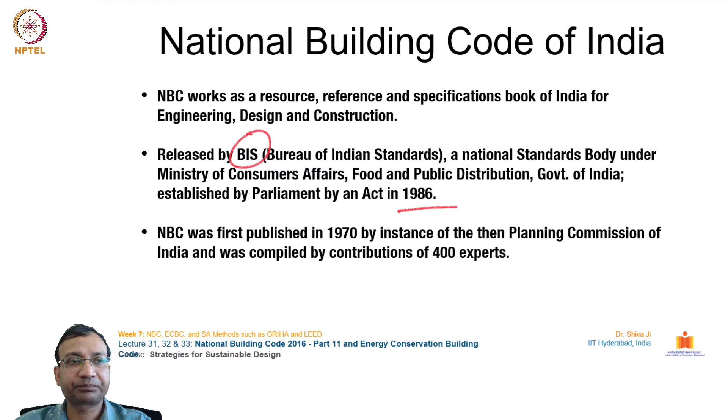NBC was first published in 1970 at the instance of the then Planning Commission of India and was compiled by contributions of over 400 experts. National Building Code of India 2016. In recent times, there is a huge change in growth and development, and there is a huge push observed in this sector, and the growth is happening very fast. So, how can this growth be maintained at a pace which corresponds to the aspects of sustainability?

With that need, this new edition was launched with an additional part, Part 11, which talks about approaches to sustainability. Due to huge changes observed in building construction activity, occupancy patterns, lifestyle changes, new material and technology uses, and a greater need in environment protection in the recent decades, there has been a paradigm shift in design and construction.

A comprehensive revision of NBC was undertaken by 22 internal expert panels involving around 1,000 experts from across various fields. A revised edition was released in 2016 with inputs from contemporary international and Indian practices. It comprises 12 parts with various sections within.

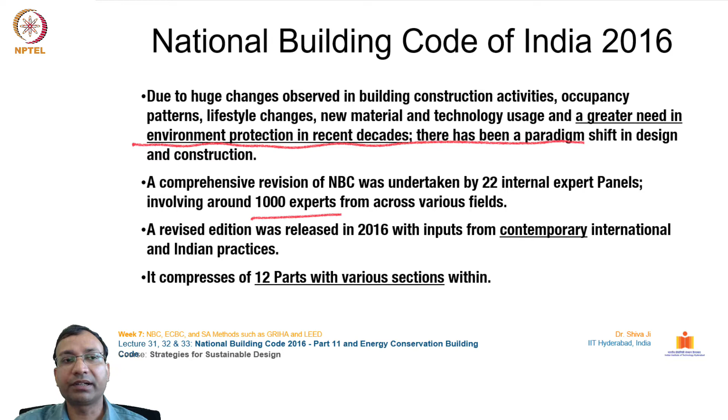So, how does this NBC work? There is wisdom taken from ancient Indian texts. I'll elaborate over here. Ancient Indian wisdom of architecture to live in sync with nature. We have been discussing several times how the ancient cultures across the world have been surviving for thousands of years without causing damage to nature and other species, other living beings.

The same was followed in India also, how our forefathers and ancestors have lived on these lands for a very long time. So, is there anything to learn from that? Let's have a look at it. Vedas have elaborated on the importance of living with Panchabhootas, that is, five elements of nature. From very early traits of our civilization, ancestors have shown strong concerns to preserve and sustain nature and surroundings.

There are several instances of weather cycle, rainfall patterns, crop management and its dependence on the weather system, control of insects, ecological balance, and several related topics. Such topics are discussed in these ancient scriptures about the annual cycles of climate and weather, how crop cycles are arranged according to the annual movement of earth around the sun, even the control of insects and maintaining ecological balance.

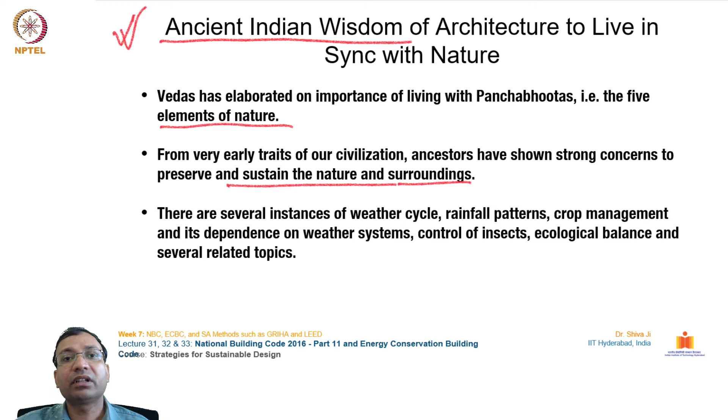Even growing crops which could be healthier for the human body in specific months. Paddy is sown in the months of monsoon, so that it gets ample rainfall and rainwater, as the paddy crop consumes a lot of water, and accordingly we can see such cycles are designed.

Historians and travelers from ancient times have recorded the use of local stones in palace making in the Mauryan period from 2nd century BC, etc. Mandu has rainwater harvested lakes surrounding the fort. We have seen the pictures of the palaces and forts of Mandu, one of the amazing pieces of architecture from those times. Stone jalis are famous to house cool air circulation in the narrow lanes of Jaisalmer, with provision of vertical air ducts from lower floors of Havelis.

We have seen these wind towers where they used to take in outside air, cool it down while passing through that tunnel, and then it emerges within the internal quarters of the Havelis, with the touch of those thick walls, and sometimes water bodies, water kept flowing inside these palaces.

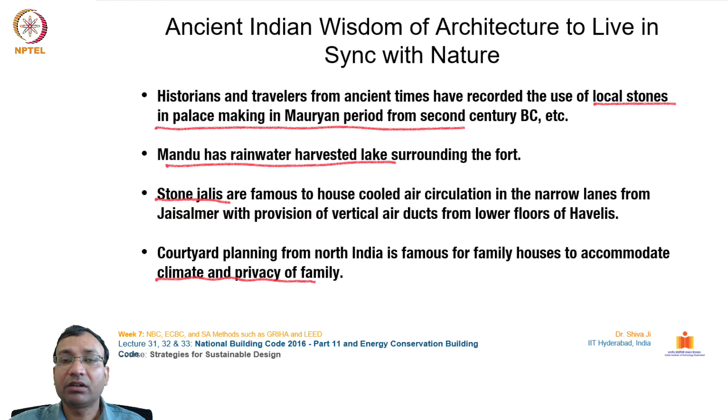Courtyard planning from North India is famous for family houses to accommodate climate and privacy of family. So it shows attention was paid towards understanding of natural elements and environments. They tried to align their designs with nature's way. This is the gist in a nutshell. We can say that the ancestors, the forefathers, tried to align their designs with nature's way.

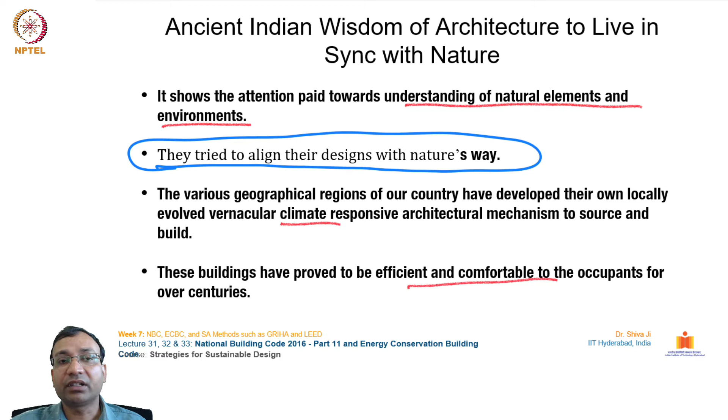The various geographical regions of our country have developed their own locally evolved vernacular, climate responsive architectural mechanisms to source and build. These buildings have proved to be efficient and comfortable to the occupants for over several centuries. The earlier buildings used passive energy efficiency techniques with no external intervention whatsoever. They stood individually, supported by surroundings only.

We see heavily industrialized and externally dependent buildings in recent times. With the buildings being erected these days, as we have been reiterating several times in our previous lectures, we are sourcing materials from across the country, in some cases from different parts of the world also. There are several repercussions of it, in the form of indirect emissions, indirect energy consumption, and several other ways.

But in ancient times, the buildings were completely based on local resources, local energy and local manpower. So they were not dependent. These buildings used to stand truly alone, with the help of the surroundings, with the help of the climate. They used to function very efficiently, providing comfortable quarters inside them. Modern buildings cannot function at all without external intervention and support of various types. The moment we stop the supply of electricity, our buildings are going to completely fail to function.

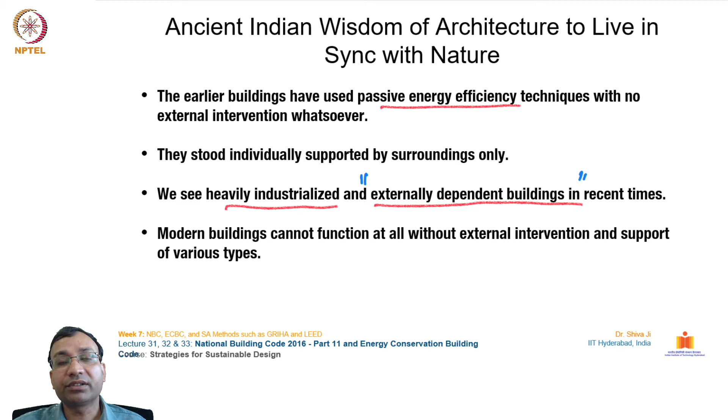Isn't it the scenario? Why make such buildings which are entirely dependent on external services and inputs? So this is the motto here to discuss. Why have such buildings which are externally dependent? Why not make them sustainable, make them stand alone on their own? If they need power, why can't they generate power on their own? If they need other resources, why can't they use the resources from the vicinity only? So that is the concept.

Today's India is again moving very fast towards creating a bigger than ever infrastructure and urbanization. We are witnessing several schemes under implementation. They are at various stages of their implementation, and they are promoting fast growth and development as far as infrastructure and the design and construction sector is concerned. It appears that soon India will no longer be a country of rural, agrarian landscape, but it's fast turning into an industrialized economy and society.

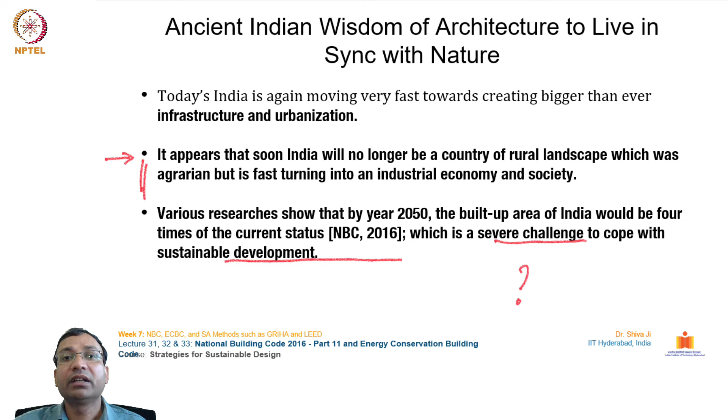Various researchers have shown that by the year 2050, the built-up area of India would be 4 times the status of the year 2016, which is a severe challenge to cope with for sustainable development. Whether India is going to behave responsibly in this fast paced development? So let's see what is the light ahead, how India has been doing traditionally, from ancient times.

We can see ancient Indian wisdom gives us three important attributes. The first one is aparigraha, the second one is sanrakshan, the third one punarchakran. The first one, aparigraha, means minimum possession. That means minimum consumerism, minimum resource utilization, minimum taking of resources from the surroundings or from anywhere. So minimizing the need; this is what we have been discussing in our previous lecture as a strategy for how to minimize the waste.

The waste is generated by the mindless consumption of products and artifacts, and even utilizing lots of services which are not that critical to meet our needs. So we have entered into an experiential economy, where we have fulfilled our basic needs and we are going beyond that. That approach is generating a lot of waste. That approach is forcing our economy, our industries to produce a lot of stuff, which is turning into landfills, and the whole place is getting polluted.

This concept, this wisdom is already given in our Indian text of aparigraha, that means minimum possession. Second, sanrakshan, that is conservation, minimum consumption. So consuming things in very little quantity, as much as we need, and preserving the rest. That means minimizing the consumption. First of all, minimizing the possession, then minimizing the consumption.

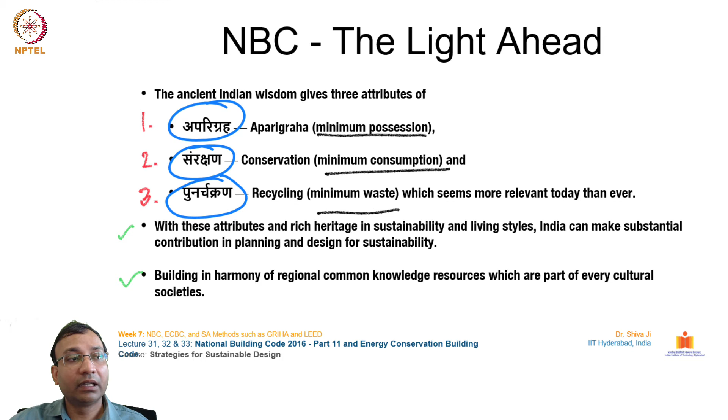Further, what are the new additions based on these philosophies, carried out as a new part in the NBC 2016? We have seen the challenges we are facing and the strategies required to deal with them. Drawing from contemporary case examples and studies in sustainability sciences, and from our ancient wisdom, the team has come up with some solutions and recommendations for creating a new part devoted to approaches to sustainability.

So we will discuss the new additions in the NBC. A whole new part, Approach to Sustainability, is included in NBC 2016. Comparing the two consecutive editions is itself sufficient to emphasize the importance of sustainability in the design and construction sector. There is a whole thought process behind introducing this part in the NBC as a resource document.

This book works as a reference and resource book for practitioners, educators, students, manufacturers, builders, every stakeholder related to the design and construction sector, because this book is constitutional in nature and is binding. One must follow the recommendations and guidelines given in this book for any building services, for any human comfort design, etc.

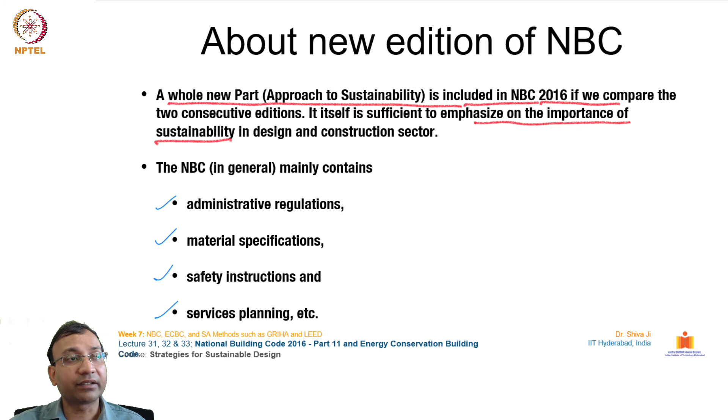About the new edition of the NBC, Part 11 talks about performance and incorporating localized features based on geography, environment, priorities, and agenda. It is not specific to any rating system and doesn't intend to set a single metric to measure and rate building performance. The provisions are kept flexible for a practitioner to use this code objectively where required. NBC gives the opportunity to pick up its individual codes and provisions and apply them as per the principles of sustainable development, functionality, comfort, safety, and other considerations for the project.

So as you can see, this NBC as an overall document is a huge compilation of the considerations which could be necessary in any given situation on the construction site.

So this provides an extensive, and actually exhaustive, set of considerations, guidelines, and regulations which may be required anywhere in any given situation. So a project, depending upon its nature and application, can choose a number of points which are relevant and necessary for it to follow. So it's a resource book; depending upon need, the provisions laid down here can be utilized.

NBC is not a rating tool either, so that is why it doesn't evaluate a building on certain parameters. That job is left for the rating tools. For example, we have GRIHA, LEED, etc. Those are specific tools for evaluation, and that is why NBC is different from any of those tools.

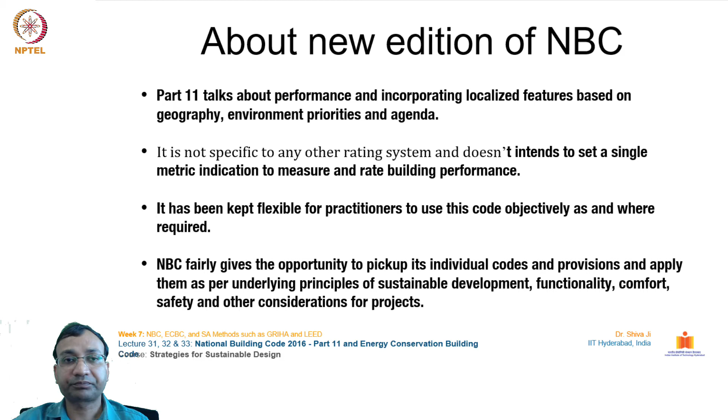Those tools evaluate a building on one or two given parameters, but NBC provides extensive considerations which could touch a building at any point of time during design, construction, operation, maintenance, and even disposal. So that is how NBC differs from any rating tool.

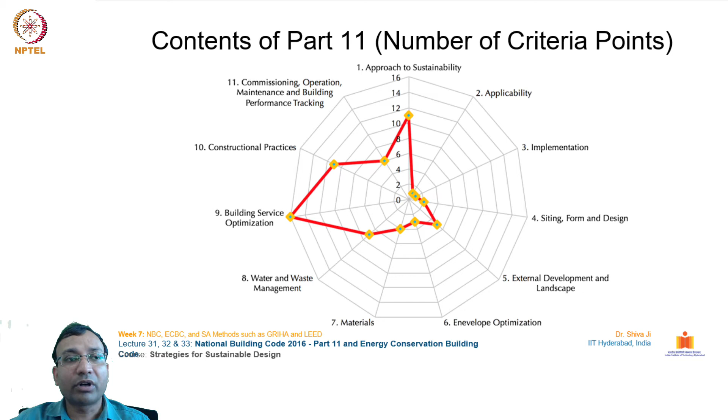For the content of part 11, you can see here a diagram which shows the kind of attention, the kind of criteria points given under these considerations for their evaluation. Approach to sustainability has around 11 points, and building service optimization has around 16 points. So this diagram shows how the criteria points are distributed in each of these sections.

GRIHA version 2015 came before NBC 2016, hence there is a lot of scope to include things in GRIHA from part 11 of NBC. We know GRIHA is a rating tool; it utilizes NBC and ECBC for drawing considerations and evaluation parameters. Since NBC came out in 2016, they released a new version of GRIHA in 2019 which utilizes this document.

As per GRIHA mandate, NBC was taken as a resource book by the GRIHA research team. NBC doesn't recognize geographical distinction, but applies in an overall sense. The research intends to find missing points in the SA method and look for those in the NBC to plug them. So from here we can find the relevant criteria needed for fulfilling a certain objective.

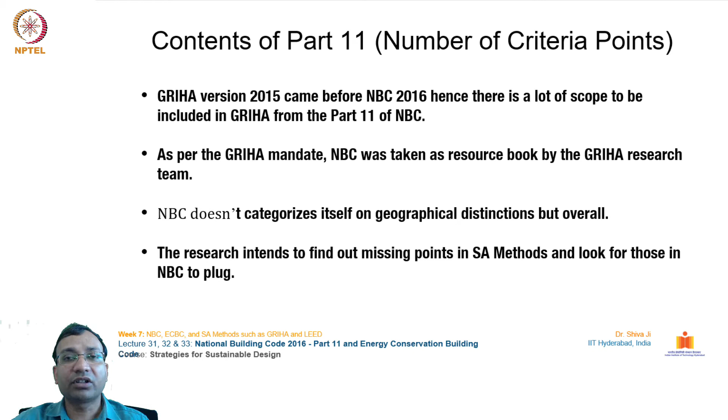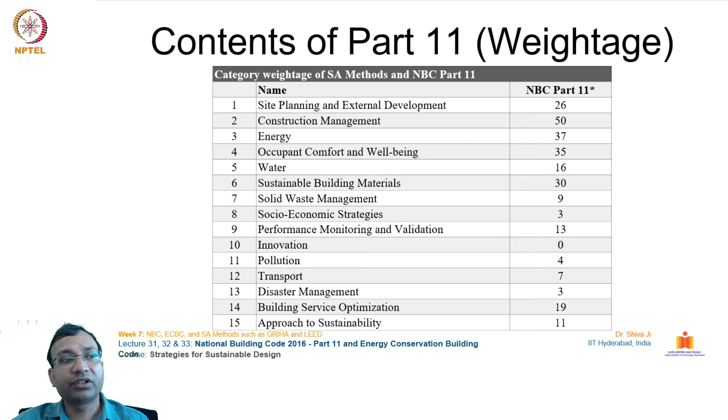For example, if you are framing a sustainability assessment method such as GRIHA, LEED, etc., you can draw from this latest edition of NBC for appropriate criteria points. Distribution-wise, you can see how much weightage is given in each of these sections. Further, I would like to explain the contents of NBC 2016.

It has two volumes. In each volume there are a certain number of parts, and within those parts there are sections and subsections depending upon the focus and weight needed. Part 0 talks about the integrated approach, a prerequisite for applying the provisions of the code. Part 1 covers definitions. Part 2 talks about administration. Part 3 talks about development controls, rules, and general building requirements.

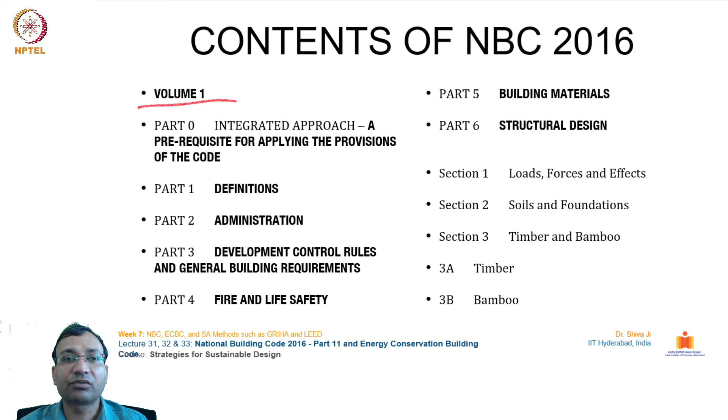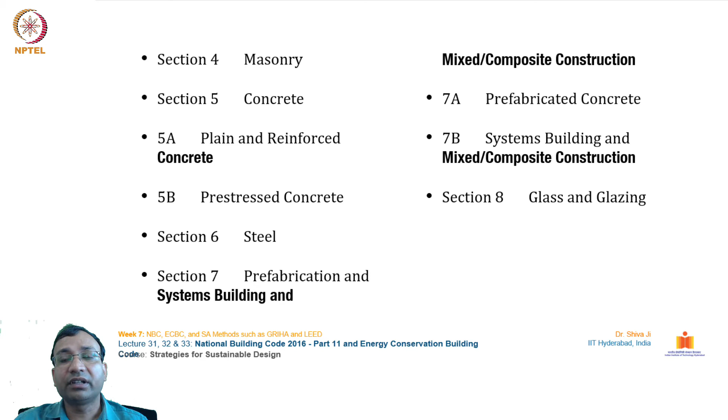Part 4 talks about fire and life safety. Part 5 talks about building materials. Part 6 talks about structural design, and under that part there are sections and subsections. Section 1 talks about loads, forces, and effects, then soils, foundation, timber, and bamboo. Then masonry, plain and reinforced concrete, pre-stressed concrete, steel, prefabrication and system building, and mixed composite construction. It has glass and glazing details also. That much was covered in volume 1.

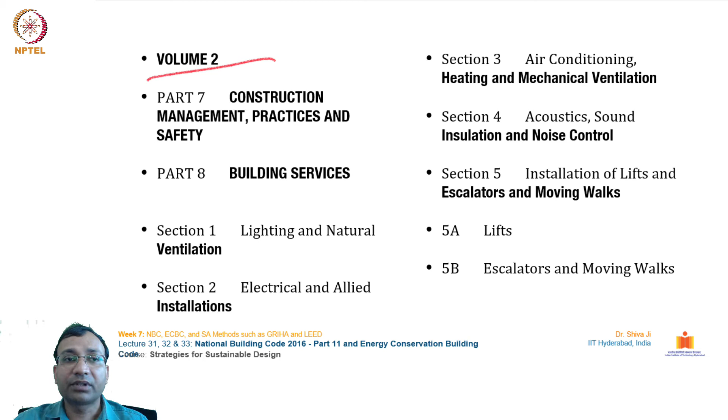Volume 2 has construction management practices and safety, building services, lighting and natural ventilation, electrical and allied installations. Then air conditioning, heating and mechanical ventilation, acoustics, sound insulation and noise control, installation of lifts, escalators and moving walks. Then information and communication enabled installations, and plumbing services including water supply, drainage and sanitation, solid waste management, and gas supply.

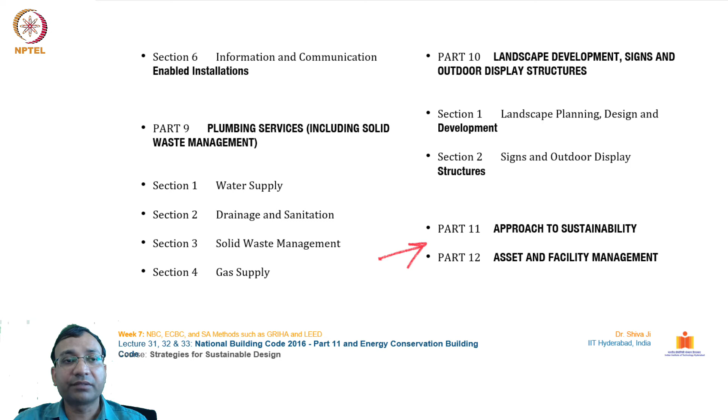It has landscape development, signs, and outdoor display structures, with sections on landscape planning, design and development, and sign and outdoor display structures. Finally comes part 11, approach to sustainability, and part 12, asset and facility management. So these are the contents of NBC, where it lays down elaborate descriptions and recommendations under these heads and subheads. Now we will discuss the Energy Conservation Building Code 2017.

So what is the purpose of the ECBC, the Energy Conservation Building Codes? The purpose of the Energy Conservation Building Codes is to provide minimum requirements for the energy efficient design and construction of buildings. The code also provides two additional sets of incremental requirements for buildings to achieve enhanced levels of energy efficiency that go beyond the minimum requirements.

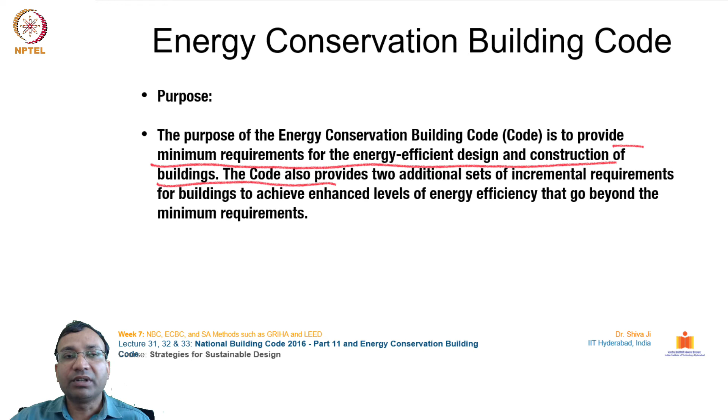So we can see this gives us minimum criteria for how much energy efficiency should be achieved in any given building. It talks about the guidelines, the recommendations, and other evaluation parameters, so that this purpose can be achieved.

And what is ECBC? The Energy Conservation Building Code was launched in May 2007 by the Bureau of Energy Efficiency, BEE, Ministry of Power. Its main objective is to establish minimum requirements for energy efficient design and construction of buildings, recognizing the energy and cost savings of efficient buildings and to help address growing energy needs. The states are in the process of notifying the ECBC code also.

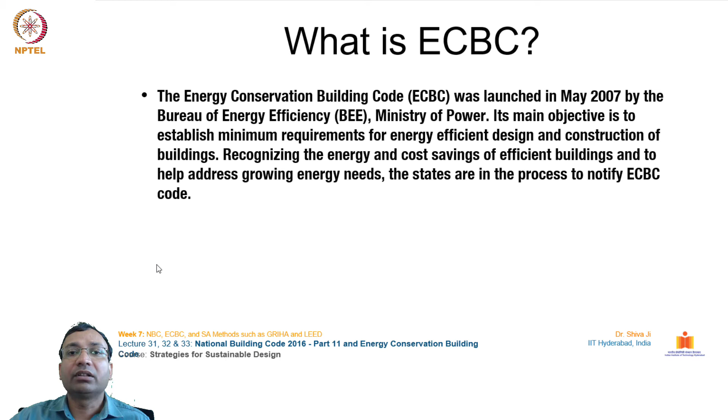So as we can see, the Ministry of Power is the main source for these ECBC codes, and in order to go for energy efficiency in buildings and several other appliances, the BEE, Bureau of Energy Efficiency, was established, which prepares these guidelines and implements them in the field. You may have noticed some home appliances, electrical and electronic appliances, are star rated for their energy efficiency. That is also one of the ways of bringing in products that comply with energy efficiency parameters.

Well, what are the contents of ECBC? We have this slide over here, which talks about the contents of ECBC 2017. Starting from the purpose to the scope, it goes to energy efficiency performance levels. It talks about building systems, precedence, reference standards, building classification. And in compliance and approach, it talks about energy performance index, determining EPI ratio, compliance approaches, mandatory requirements, prescriptive methods, whole building performance method.

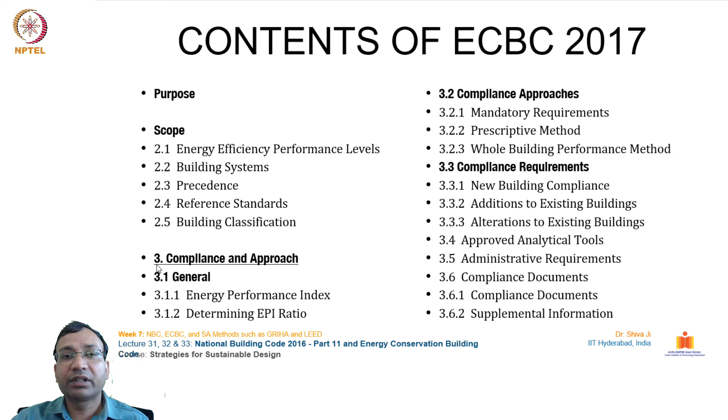There are several other documents and recommendations. You can see the list is given over here, which talks about how to design a particular component. For example, in the building envelope chapter, there are mandatory requirements for fenestrations, opaque constructions, daylighting, building envelope sealing. Prescriptive requirements, for example, for roofing, opaque external walls, vertical fenestrations, skylights, building envelope trade-off methods, standard building EPF calculations.

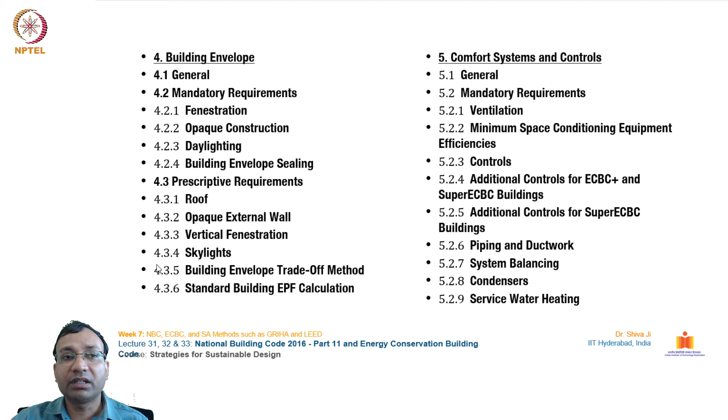For the comfort systems and controls, there are mandatory requirements for ventilation, minimum space conditioning equipment efficiencies, controls, additional controls for ECBC Plus and Super ECBC buildings, additional controls for Super ECBC buildings, piping and ductwork, system balancing, condensers, and service water heating. The prescriptive requirements cover pumps, cooling towers, economizers, variable flow hydronic systems, boilers, energy recovery, total system efficiency, alternate compliance approach, and low energy comfort systems, etc.

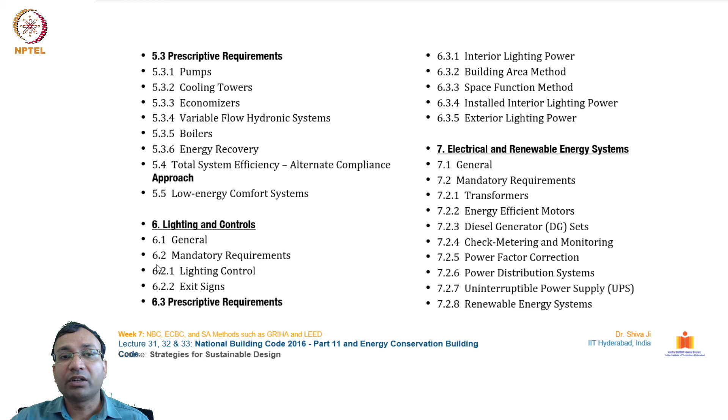It talks about lighting and controls also, lighting controls for exit signs, and prescriptive requirements for interior lighting power, building area method, space function method, installed interior lighting power, exterior lighting power, etc. And in electrical and renewable energy systems, it talks about transformers, energy efficient motors, diesel generator sets, check metering and monitoring, power factor correction, power distribution systems, uninterruptible power supply, UPS, renewable energy systems, and so on.

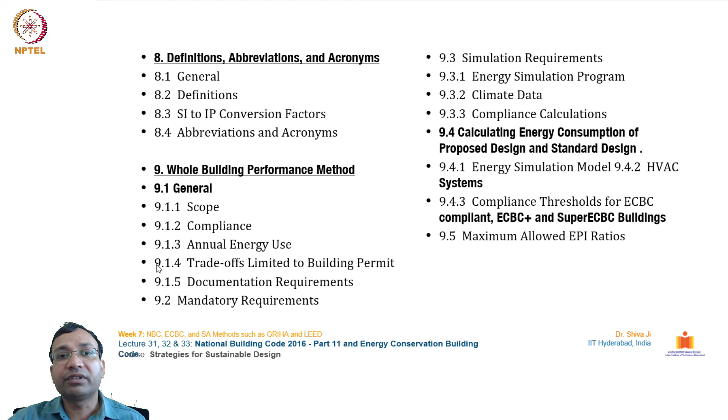So these are the various recommendations which ECBC gives, so that energy efficiency can be achieved in each and every component of buildings related to energy requirements.

Well, why is it important? In India, two-thirds of the total building stock that will exist in 2030 is yet to be built. That means huge construction is coming our way. New buildings pose a great challenge to meeting increasing energy demand, and we know buildings are the largest consumer of power across the world. Almost 40% of the total energy produced across the world is taken up by buildings, which is the highest among all sectors, even leaving the industry sector behind.

So ECBC sets minimum energy efficiency levels for commercial buildings, locking in energy savings for years to come, retaining occupant comfort while combating climate change. So this is why it is important.

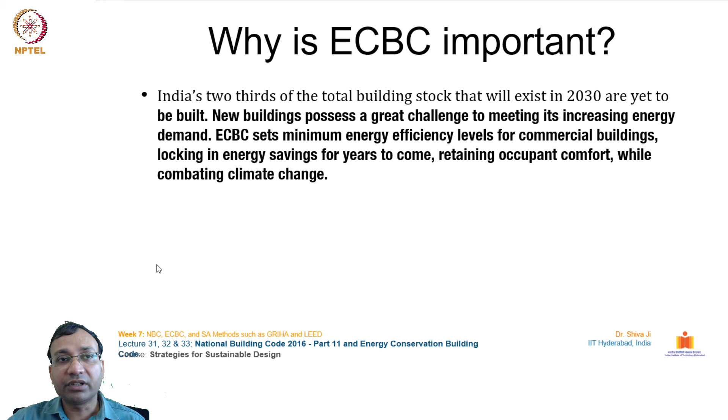Is it applicable to all the buildings? Well, ECBC is applicable to almost all buildings or building complexes that have a connected load of 100 kilowatts or greater, or a contract demand of 120 kVA or greater, and used for commercial purposes. So this is where ECBC becomes mandatory. It is applicable for both government and private buildings.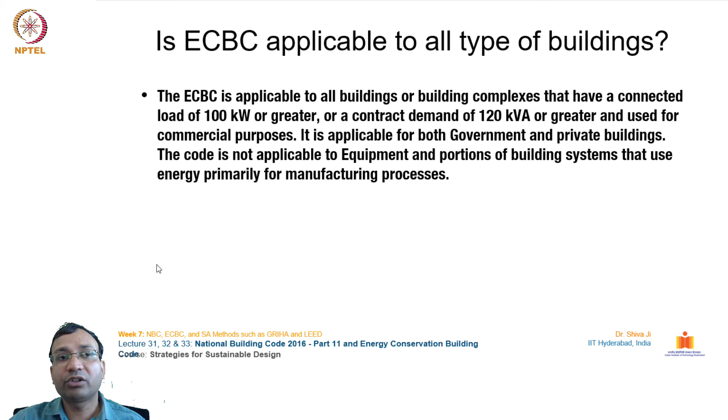The code is not applicable to equipment and portions of building systems that use energy primarily for manufacturing processes.

The different types of buildings classified under ECBC can be seen as 6 major categories: hospitality, assembly, healthcare, business, education, and shopping facility. This includes star hotels, non-star hotels, resorts, theaters, transport service facilities, multiplexes, hospitals, OPDs, small offices, medium and large offices, schools, colleges, universities, institutions, shopping malls, standalone retails, open gallery malls, supermarkets, etc.

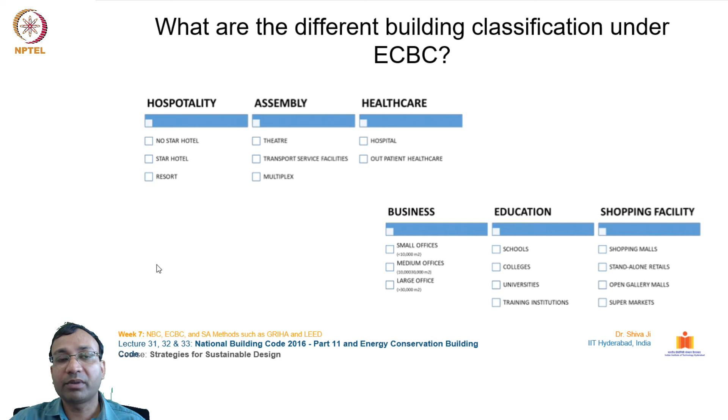So these are all the bigger establishments whose power requirements are heavy. So these ECBC norms are actually mandatory for such facilities.

What are the different compliance approaches to meet ECBC compliance? There are three compliance approaches: prescriptive, building trade-off, and whole building performance approach. We'll see one by one.

In the prescriptive approach, flexibility is kept low, expert knowledge is kept low, and it requires little energy expertise. It provides minimum performance requirement with no flexibility. So this is the simplest one.

In the second approach, flexibility is kept at the medium level, and expert knowledge at the medium level. It allows some flexibility through the balance of some high efficiency components with other lower efficiency components.

Finally, the third one, the whole building performance approach. The flexibility level here is very high, and expert knowledge is high. It allows flexibility in meeting or exceeding energy efficiency requirements as compared to a baseline building.

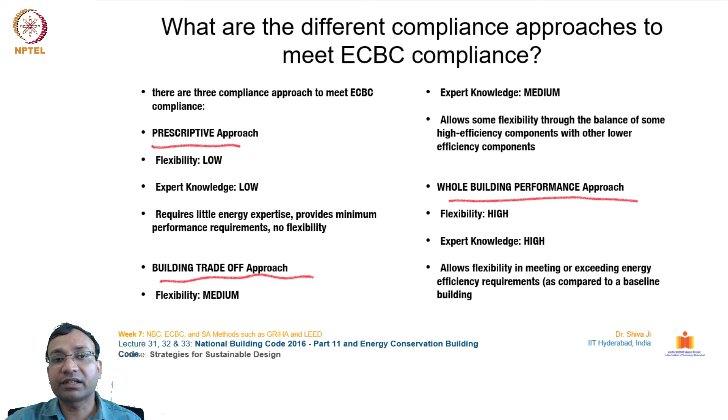What are the mandatory code requirements? Irrespective of whether one opts for a whole building performance method or prescriptive method, code compliance requires the building to fulfill a set of mandatory provisions. The mandatory requirements are described under sections 3.2.1, 4.2, 5.2, 6.2, and 7.2 of the ECBC code.

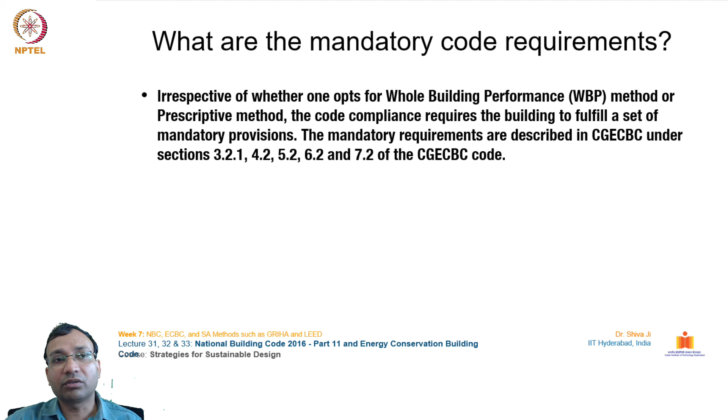What is the EPI of a building? This is one of the important things I wanted to elaborate on. EPI stands for Energy Performance Index, which is given as: EPI equals annual energy consumption in kilowatt hour (kWh), divided by total built up area excluding the unconditioned basement.

So unconditioned space is like a basement, etc. This is where the performance index of a building is evaluated on the energy parameter, known as EPI. So it's how much area is consuming energy, divided by the total built up area - per square meter, for example, how much energy is being consumed on an annual basis. That number is known as EPI. Why is this important?

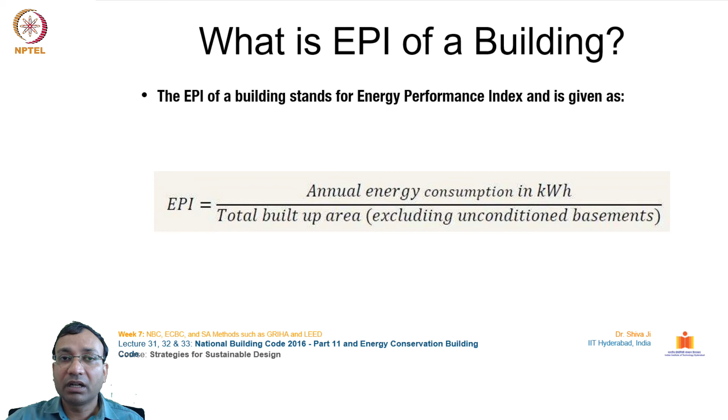Because there are certain slabs given for optimal consumption of power in buildings, divided based on the different types of building also, whether it is retail, hospitality, educational, etc. So a building must come closer to that to attain efficiency on the energy consumption part.

What is - let's see, there is another combination coming up. This is the EPI ratio. So what is EPI ratio? For that understanding, we must understand how to derive this. So let's see this slide.

What is the difference between a standard building and a proposed building? A proposed building is consistent with the actual design of the building and complies with all mandatory requirements of ECBC. A standard building is a standardized building that has the same building floor area, gross wall area, and gross roof area as the proposed building, complies with the mandatory requirements of sections 4.2, 5.2, 6.2, and 7.2, and minimally complies with prescriptive requirements of sections 4.3, 5.3, and 6.3 for ECBC buildings.

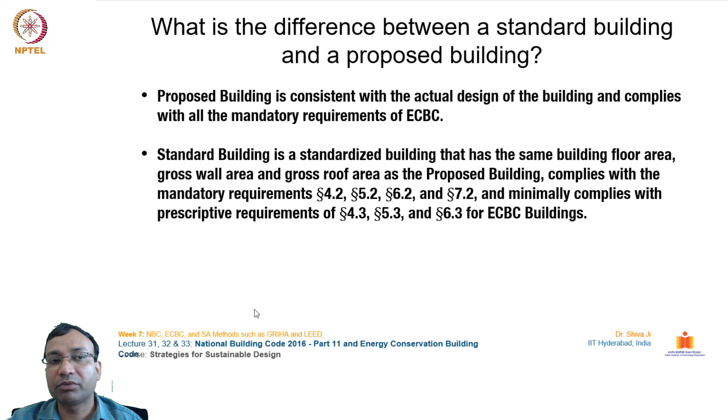So based on this, what is the EPI ratio? The EPI ratio is the ratio of the EPI of the proposed building to the EPI of the standard building, simply: EPI ratio equals EPI of proposed building divided by EPI of standard building.

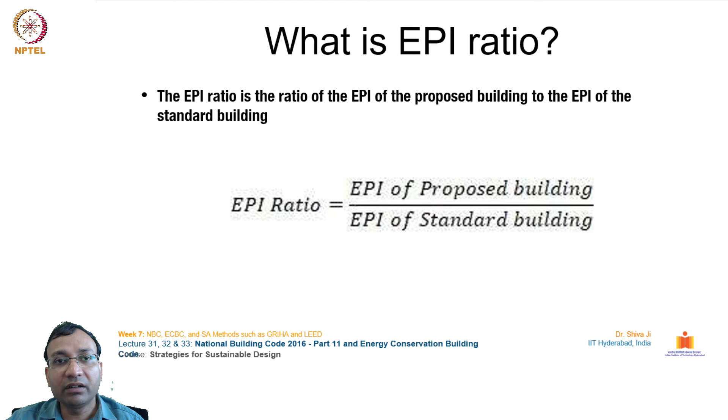Standard building is like a base case. How well is the performance of your proposed building? This is checked with the base case, and you get the EPI ratio. This will define how much deviation the proposed building has compared to the standard building. If the ratio is close to 1, it is taken as the optimum case.

Now, what is U value? U value is a measure of heat loss. It is expressed in watts per meter square Kelvin, and shows the amount of heat loss in watts per square meter of material, for example wall, roof, floor, etc. When the temperature outside is at least 1 degree lower, the lower the U value, the better the insulation provided by the material.

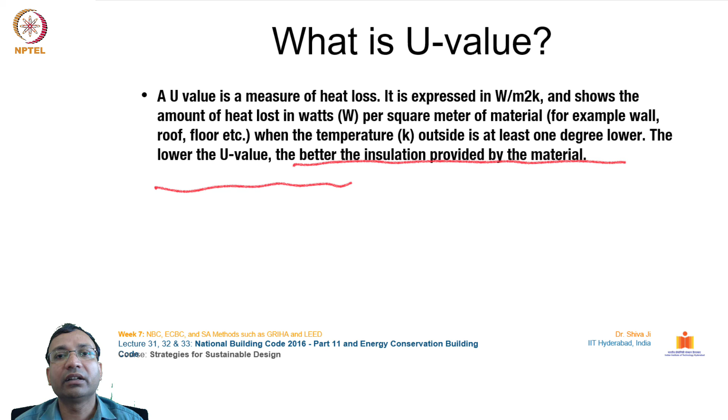So U value provides the thermal ability, how efficient the material is to reduce or minimize heat loss. We use this U value to calculate the property of such materials, so efficient material can be utilized, for example where there is air conditioning or a huge temperature gap between inside and outside. An efficient U value will protect us from heat loss, from energy loss.

Where can I find construction material properties? For your calculations, it's advised you can find construction material properties from the suppliers, or the test certificates. Most companies are asked and recommended to provide specification data regarding their product. They usually provide a manual, a booklet, or a one-page document with specifications like U value, so the information is handy while undertaking the design process.

Secondly, if they are not available with the manufacturer, vendor, or supplier, you can refer to the appendix of ECBC for the default values of certain standard materials which are commonly used in the market. From there you can collect the data and conduct your calculations in your project.